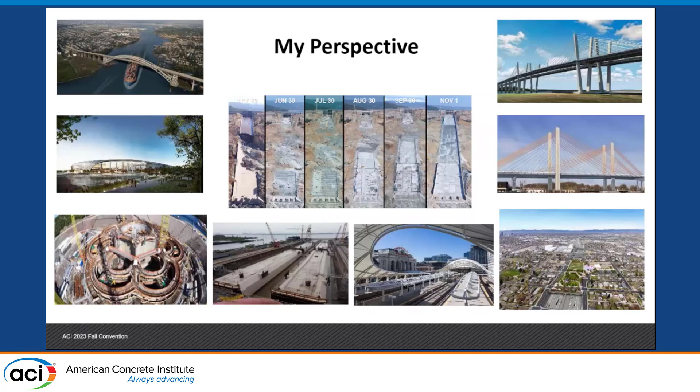The type of clients you're dealing with are very different too, because we typically have government clients, federal clients, highway authorities, bridge clients, marine clients, Navy clients. So the expectations are very different than a traditional private client where you can negotiate things.

Another challenge we have is that the work we do isn't just a high-rise building. We need to take the concrete from point A to point B, and typically the challenges are not the same. Although you can be in New York with very difficult challenges for placing concrete up, we sometimes have to barge concrete, pumping it in the river or in the ocean.

So you start making sense of and challenging the research we have to read sometimes in ACI, because it doesn't make any sense. And the other part is that we have different expectations of construction.

With segmental bridges, you need to deal not only with the precast work, quality, and the cantilever balance, but once you connect the bridge, you need a very high early strength concrete mix that's flowable, heavily reinforced, and then control the cracking that forms from shrinkage and restraint conditions, plus the thermal cycles before post-tensioning. Very difficult situations to control cracking, but it's part of what we do.

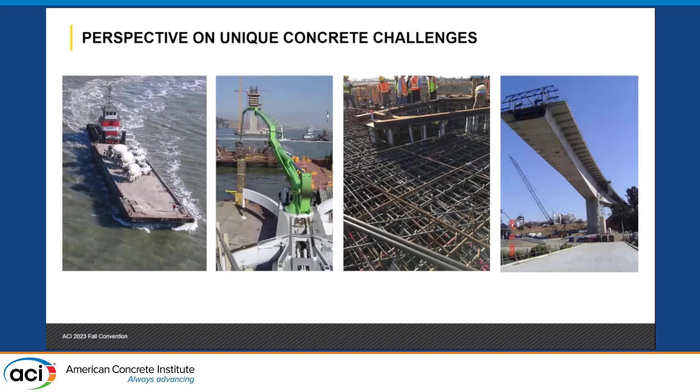This often happens with people who stay just in their own state, their own city, their own town, and never get out. If you get out of your town, you'll realize concrete is very different everywhere you go — actually, you were talking about shrinkage.

There's no good number because depending where you go, 0.05 shrinkage is great and 0.03 may be great in another part of the industry, and the aggregates you have locally cannot allow you to have very low shrinkage in some parts of the United States. So again, there's no magic number, but we get the false impression that concrete is just one size fits all and you can make it work.

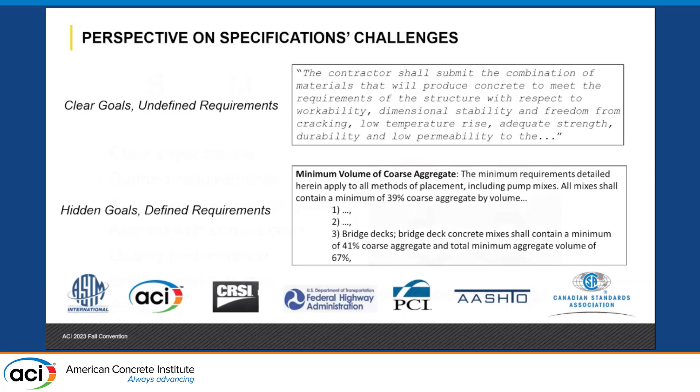And then as I'm looking at all that, I'm also part of a lot of initiatives for productivity and constructability of specifications for concrete. And I believe we sometimes try to engineer too much the approach to specifications. If you kind of step back and look at what we have learned to set goals, to truly set goals for us, right? Even in the management side, as a person, as a professional, a smart way of setting a spec is pretty easy.

Because when you think about it, you need to be very specific to what you're requiring, right? You need to make sure that you have a measurable way to assess that. You need to make sure it can be achieved to the point that we're talking here. Can it be achieved? Then it needs to be relevant to the work, to the point that the previous presenter spoke to. If the crack doesn't matter, what do you care, right? And then time bound, right? So there needs to be a time bound limitation too.

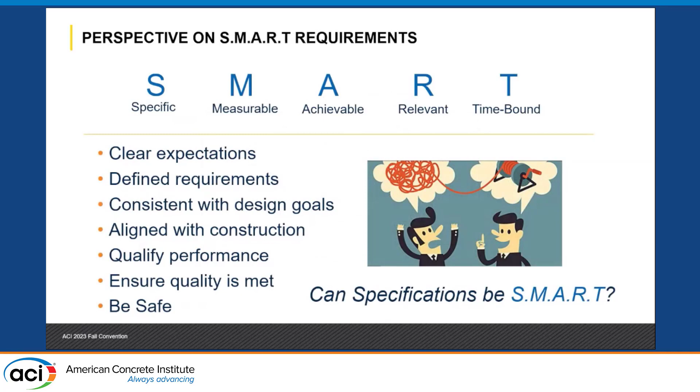Because if you get a crack after the structure is in service, that crack formed most likely well later than you build the work. So now why is the contractor responsible? A crack that happens that late is actually a design issue, not a contractor issue. You understand what I'm saying? So why would you all of a sudden have the contractor trying to fix a crack that happened 3 years later when the design should have actually been addressing the long-term cracking issues that could have occurred? So again, understanding how we develop specs is extremely important to make sure that we have the right solutions in front of us. Okay?

And this is actually, if you are not going to take anything from this presentation, pretty much this is your snapshot of the presentation. I always like to show a little bit on the front and make sure we close on the same topic. But pretty much what we're saying is this is not a one-person solution. Okay? This is not the designer coming with the best design. Because what happens if then you get the worst contractor and you have a bad mix, right? What happens if you have the best contractor, the best concrete supplier, the best designer, all of them put in their best effort, and the client doesn't want to spend the money?

Contractors, designers, producers do what we're paid to do. If you're not getting paid to do something, why would you do it? Why doesn't the owner want to spend more money? It's important to understand that we are dealing many times with cracking because that's what was bought. To the previous presenter's theme, they bought something, but nobody told them that actually what they bought is a different type of project.

It's extreme. I always say, I think I agree 100% with Calvin, I agree 100% with the design perspective, but what I believe is extremely important is that we realize there's nothing wrong with having a difficult conversation at the beginning. There's nothing wrong with going to that owner and saying, Mr. Owner, these are the alternatives we have in front of you. We have these alternatives that have some cracking issues, and we have an exposure condition that is a concern. I believe we need to address that.

Or no. Or just talk about, we have this cracking, we believe that cracking is within the standards, and actually if you see cracking as we start building the work, that's within the design expectations, right? And see what happens at that early stage. Again, to Calvin's point, most likely the owner is going to be stubborn, it's not going to make the decision.

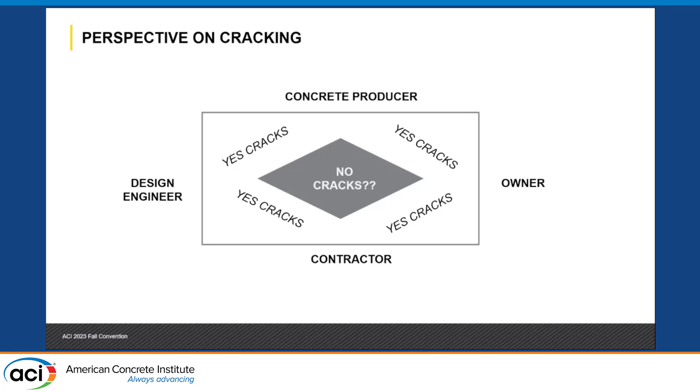So again, it's a factor of group involvement, and make sure that you get to that middle. Once you get there, there's no guarantees on no cracks, but certainly you can maybe reduce the cracking once you agree on the approach to actually get the solution.

So we'll go step by step because it's important to understand construction, and what I'm going to be showing will have less text as you start seeing my presentation get more figures and photos. But certainly there's an aspect of strength, durability, workability, and economics.

Once you approach any concrete project, you need to understand there's a balancing act. It's not all about, we got a crack, and then what? If you get a concrete mix that's very low shrinkage with good aggregates and all that, but you cannot place it, well, that's worse, because now you're going to create voids, consolidation issues, and there's going to be no ability to develop that strength. So you need to make sure you balance the approach to concrete.

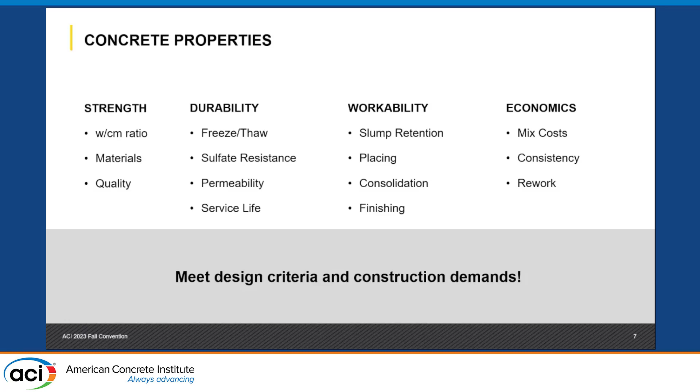The other thing is, what is the schedule in front of us to develop that solution? If you go to a commercial concrete producer and he doesn't have the solution for you to get low shrinkage or a low risk of cracking in the mix, that's going to take time. Depending on the type of work you have, that's likely going to be another issue as you start building the work. So make sure that you understand what is in front of you.

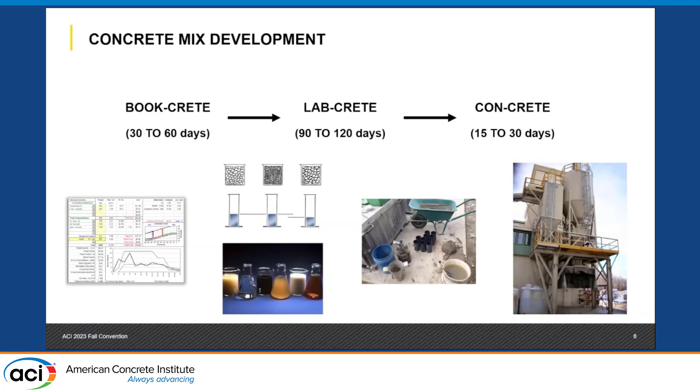For the concrete producers, putting an admixture is not going to solve your problem. We continue to see, well, let's put an admixture and that's going to make it work. You need to develop the good mix first.

Make sure that you have a mix with good quality materials, you optimize the water demand, reduce paste content, reduce mortar content, optimize it for the purpose of the work. Then the admixtures help you enhance that performance for whatever application you're going to have. If you have a bad mix and you try to put admixtures, it's still going to be a bad mix, just with a lot of different admixtures.

Then the economics. Many people misunderstand economics of concrete, and many believe that contractors think, give me the cheapest mix. The cheapest mix is not the best solution, I'll tell you that, and you can say a contractor said it. It needs to be a mix that is optimized to do the work that you need to do.

Talking back about architectural concrete, let's assume you have an architectural concrete mix that gives you a beautiful finish, but it cracks. How good is that? You still have a bunch of cracks in the architectural face, and now you have to deal with that.

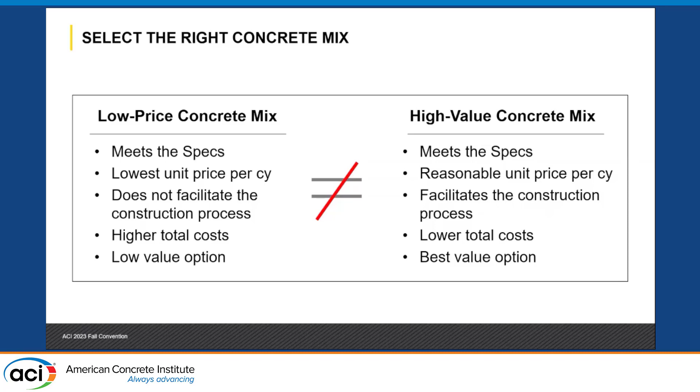So make sure that you understand, as a concrete producer, to ask the right questions. Don't try to get into the cheapest solution. I know we have a competitive market, we get it, but it's not necessarily about being cheapest. Maybe you need to go a little bit higher, sell the value of the mix, and educate the concrete contractor and the owner to make sure you get the right solution.

And the other part that I want to talk about is lubrication. Lubrication is extremely important for construction. As you saw in the type of work we do, sometimes you have to pump concrete long distances, and take it through different ways of transportation. You need that concrete to be workable.

So I always make sure people understand concrete from this perspective: there are 3 levels of lubrication. The first level of lubrication, what is it? The water, right? What happens next? You get the paste, and then you get the mortar. The three of them need to be balanced.

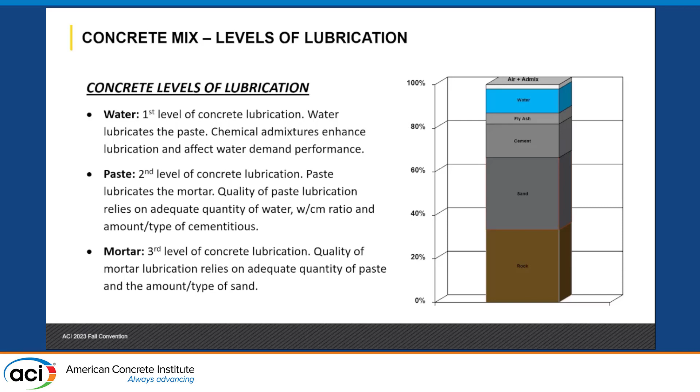If you have a mix with low water, you're going to have a poor quality paste. If you have a mix with low paste, you're going to have a bad quality mortar. And if you have low mortar, you're going to have bad quality concrete. So it's a balancing act of how you approach concrete mixes, and all that is here because to build work, you need to have different levels of lubrication. I didn't come up with this.

If you go through these references, CA and ACI, you're going to see that different types of applications require different levels of lubrication. Okay, so let's talk about cracking.

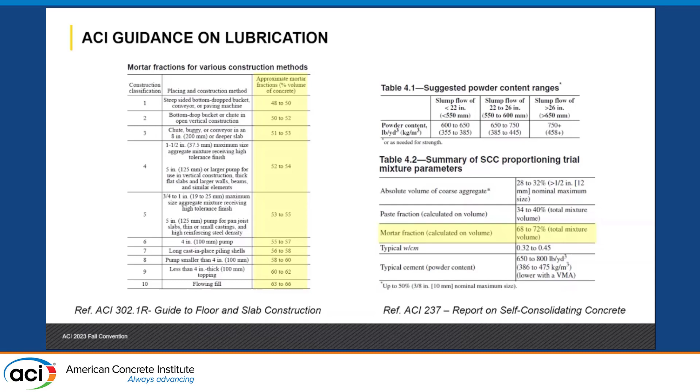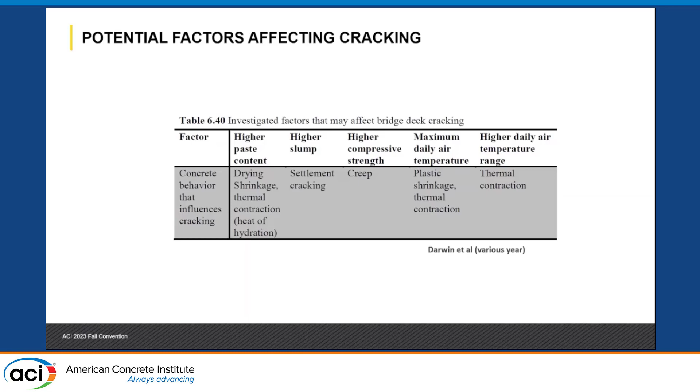I'm using this for reference in respect to Dr. Darwin. I believe he has done a lot of good work on bridge decks and all that, but I think he makes a point here. There's a lot of different aspects of concrete work that actually impact bridge deck construction that can result in cracking. So let's talk about one aspect we deal with a lot, and then I'll talk about construction efforts and means and methods.

And then what is the other issue that could happen in the plastic state? You're going to end up with plastic shrinkage cracks. That plastic shrinkage cracks typically tend to be limited to the top. However, with time, drying shrinkage comes and compounds to those cracks and they get a little bit deeper. But that's a responsibility of the contractor to protect and cure the concrete in a timely fashion.

Sometimes, and I'm not going to blame the contractor 100% on this, you get mixes that have low bleeding. But that's why concrete contractors need to start understanding concrete materials. I believe what's happening right now in the industry, with a lot of discussion around the change to 1L cements and contractors and concrete producers and all that, is that we've been used to having a certain type of material for a long time, and now with the change we realize we need to get more involved.

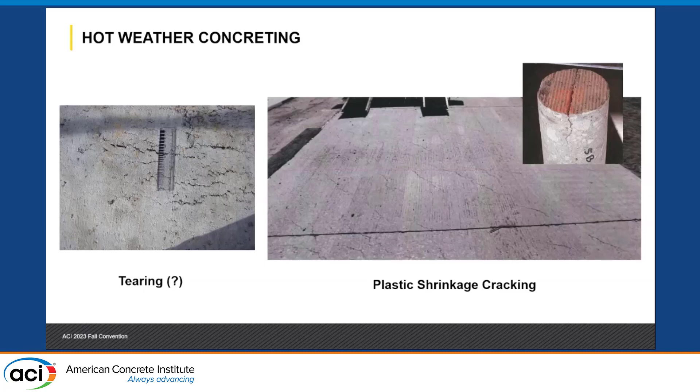And that's how it looks. I actually have it embedded there. That's how plastic shrinkage cracks look. So many people have never seen it. They believe it goes deep. In this case, it's pretty shallow.

What about this crack? I'm going to show it here and let you figure out what happened, because it's pretty easy, right? What do you think happened? You see the crack here? You see there's another crack here? Do you think that crack was caused by an issue during construction, or do you think there's already an existing crack or disruption in the surface below that is actually reflecting the crack on the top?

How can you control that? Because you did not design it, you're just building the work, and you have that interruption of continuity on the bottom of the substrate surface. All of a sudden you build it exactly to the drawings, exactly to the specs, and you get a crack there. Who's responsible for that? Well, eventually it doesn't matter. You're the contractor, you're going to have to eventually fix a lot of things to make the client happy, and eventually that becomes a negotiable point.

But as designers, you need to have a better understanding of the site. If you have conditions on the site that are going to create that condition, and they fall even in a bearing surface, what do you need to do? Is there a detail in your design drawings to actually modify that location, to disrupt the concrete element, to make sure you don't get those reflective cracks?

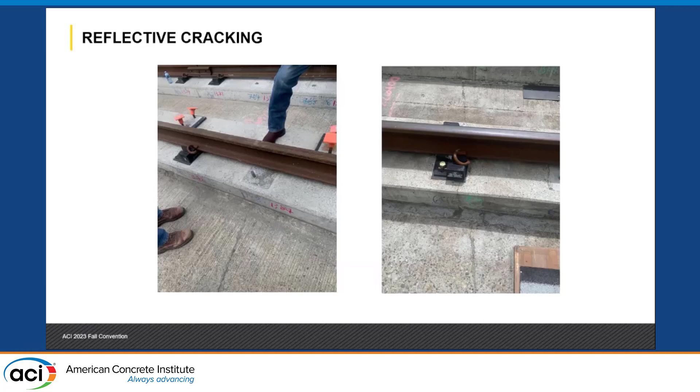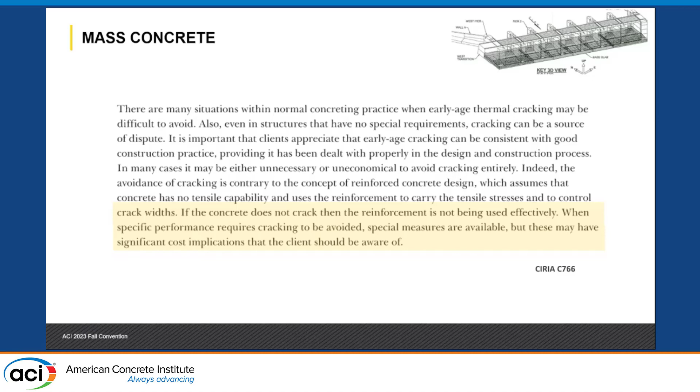You create a thermal shock, you crack like a glass, think about it that way. But these are mass gradient cracks. Mass gradient cracks are associated with the thermal contraction of an element. Thermal contraction of an element is not about the temperature difference, it's actually from the temperature drop from the maximum to the equilibrium temperature. And that's what you see here.

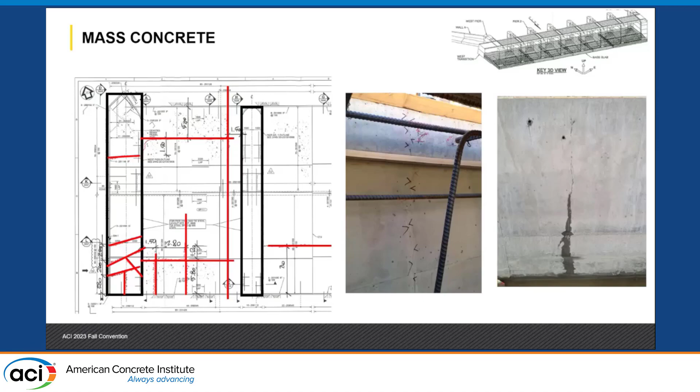Too much water. Why too much water? I'm going to pick on you, whoever said that. Bad mix design. What happens if you have too much water? That's one cause, but tell me, what is it? Why do you say that? Why do you say too much water is a problem?

Okay, so you may have a lot of bleeding and you may lose the viscosity of the paste and therefore you settle. Okay, that can be a cause. Great. What about on the right side? What else could be a problem? Plastic settlement cracks, on the right side. High cementitious. Okay, how would you cause that with high cementitious?

Okay, got you. So you're saying a high amount of pozzolanic material can delay the setting? Okay, got you. Those are potential causes, right?

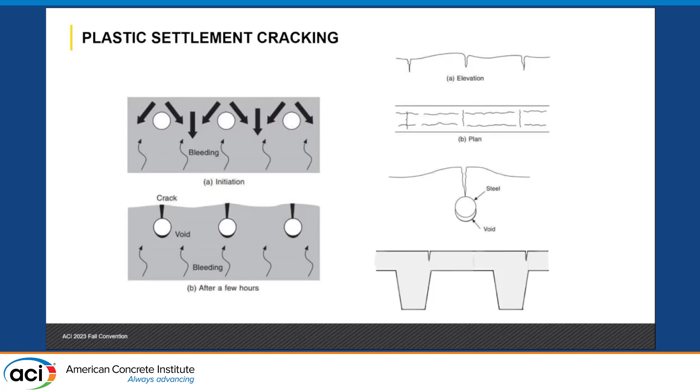The intent is that in the past, slump was managed with water, so the higher the slump, the more water, and then the more water dilutes the paste, creating lower viscosity. To improve resistance to plastic settlement cracks, you need higher viscosity, so you don't get settlement of the mix and everybody stays happy together in the same place.

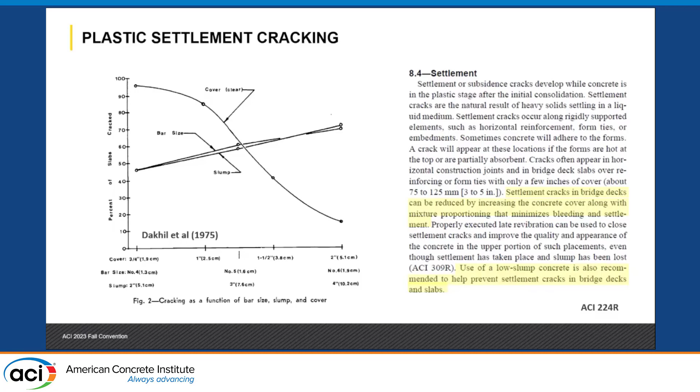And the clients, the people who aren't here sometimes, get misled and misunderstand the concepts. All they say is, yeah, we need a low slump concrete for your bridge deck to be free of cracks. Well, good luck, because then how are you going to build it?

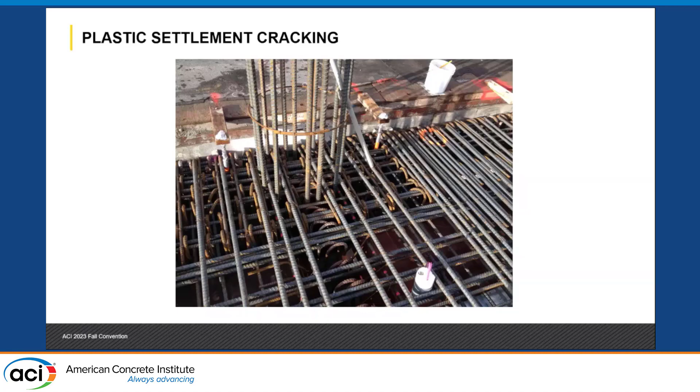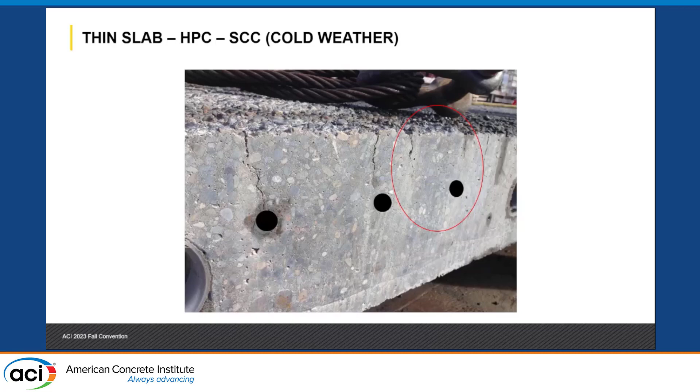This is a project that got into a cold weather situation from a cold front, so the top surface got frozen. That's why the quality of the surface is damaged. When we did the cuts, we saw a lot of cracks typical of plastic settlement. In this case, the mix was not setting for a long time. The cold weather came, it wasn't protected, it stayed without setting for a long time, so you had a plastic condition and it ended up settling on top of the rebar.

Now this one, what is it? All of a sudden you have a low slump condition, but you have mass concrete, so it relates to the point you brought up earlier about high SCM replacements. When you have high pozzolanic material and low temperature, it takes longer for the material to set, and by not setting, the same effects happen.

In this case it's magnified because you have a thicker section, a mass concrete section, so imagine the mass settling on top of that rigid rebar, and you get those types of cracks. So both can happen - in low slump concrete and in self-consolidating concrete. So it's not necessarily the slump that matters, but the material you use, the temperature conditions, and the level of stiffness in the rebar system.

Even when you have a lot of rebar connected together, you don't get that effect, because you're bridging across the rebar. But if you have just one rebar, and 12 inches away another rebar, you create a sack, like a hammock condition, and you see a bigger effect of that.

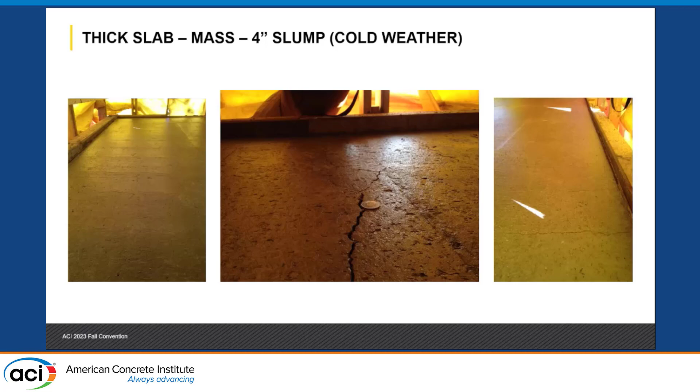Somebody's shaking their head there. What does that mean when you're shaking your head?

It's an architectural detail. It doesn't do anything. You're just scratching the surface of a system that has reinforcement crossing through, and the sawcut is only like this, it doesn't get deep enough to create a cut. So you're just making a nice reveal on the surface that makes it look nice, but once it starts cracking, it's going to crack all over the place.

So in this case, to make it work, what you needed to do is make sure the design provided a nice sawcut, deep enough, to make sure that system is going to get dislodged there, and discontinue the welded wire mesh at that location. So you don't have continuity of the rebar, of the mesh in this case. You allow the system to pretty much break there.

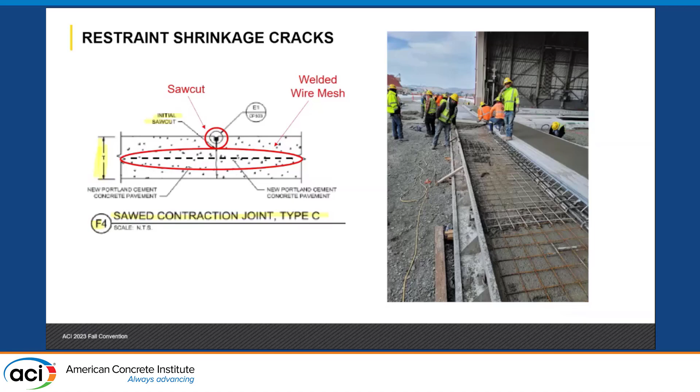So we got a case like that, and we presented all this to the client. It's a federal client, so we explained that the design in front of us didn't make sense, that all the remove and replace they were asking for was not necessarily in alignment with the specifications and the design.

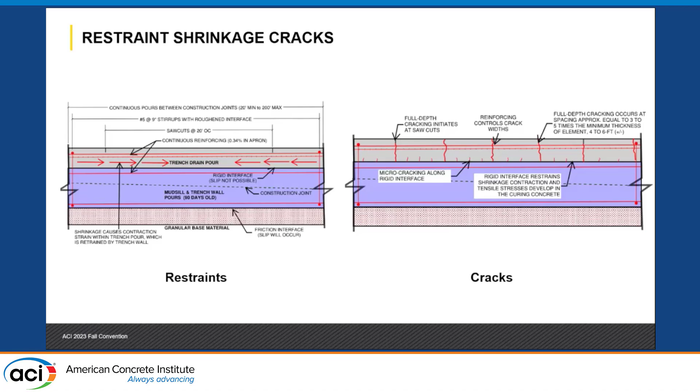And to Calvin's point, he mentioned he's never seen anybody doing this cracking analysis, by any designer, which is true. People don't do this when they're actually designing. You start using this when you have a problem and a design team that has the capabilities. So this is what we ended up showing. We did the cracking analysis of the whole system, showing that what they designed and provided us was going to crack exactly the way it cracked. It cracked every certain amount of feet, exactly the way the book will read and the way ACI will show you. We just showed with analysis that that's what they were going to get.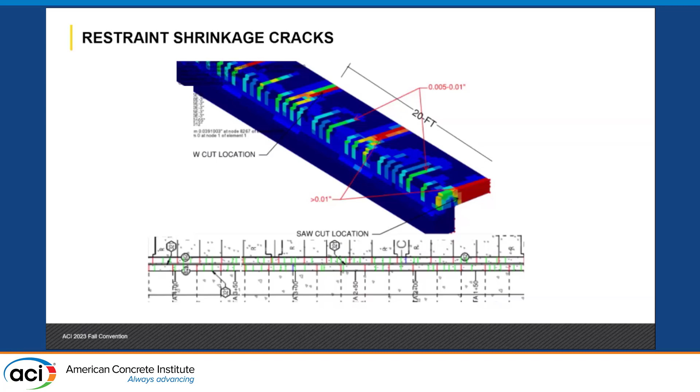Okay, then the next one, the last one I'm going to talk about, is also another very interesting restraint shrinkage cracking. Well, it was all sorts of things, but restraint cracking during construction. This one, as you can see, is a water filtration, water treatment system. One of the failures in this design is they didn't have any disruption of continuity of rebar, either by joints or by appropriate detailing.

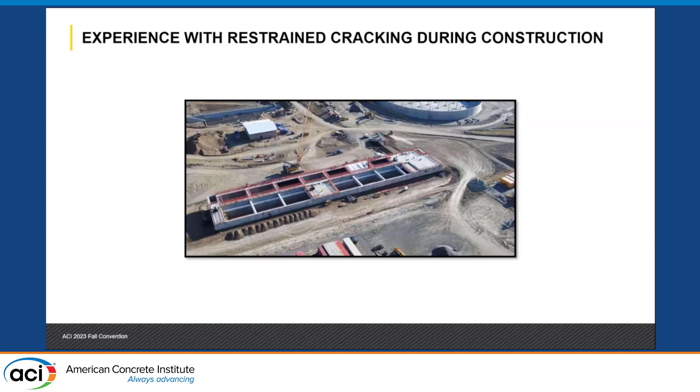Let's put it that way to avoid confusion. But in this case, something they did that created a lot of cracking, as many people do, is in the lower part of the walls you have a lot of rebar. But then at some point they say, well, we are far from the restraint at the bottom, so I'm going to start releasing a lot of that rebar. So what ended up happening is we were very compliant on the part under about 4 feet there, and then after that we started seeing wider cracks.

Why is that a contractor problem? The design is telling them that what they got is working the way it was designed to work. They put more rebar at the bottom, you close the cracks. They space out the rebar at the top, then you get bigger cracks. Why is that a contractor issue? Is there anybody who can tell me that's a contractor issue, getting cracked? The contractor is not an expert on design, and the contractor doesn't inspect the design, but that's not a contractor issue. The contractor followed the specs, used the materials specified, used everything approved for construction, built the work. There was no non-compliance. We let the concrete get built, and as the concrete started getting more restraint, the cracks started to happen.

We got to see crack widths of 0.012, 0.014 in some cases. It all varies by the detail I'm going to show you now.

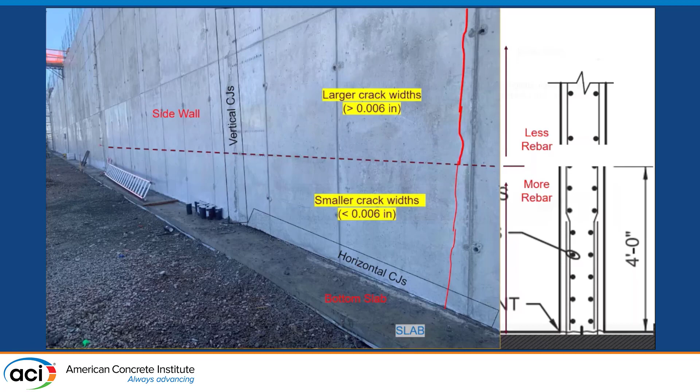So then the other part we started seeing was a lot of cracks at this transition zone. That's another detail I always say is a bad detail. You don't want to have something extremely stiff, then disconnected by something really loose, because what's going to happen? The more flexible part versus the rigid part, and then the transition is going to have an immediate crack at that location. So what you can see here, I tried my best to portray this, but you have a very rigid system, this is a top view. You have a big wall, heavily reinforced. This is a beam, so now you have all the connection there and all the restraints. And all of a sudden, the transition here, look at how it is.

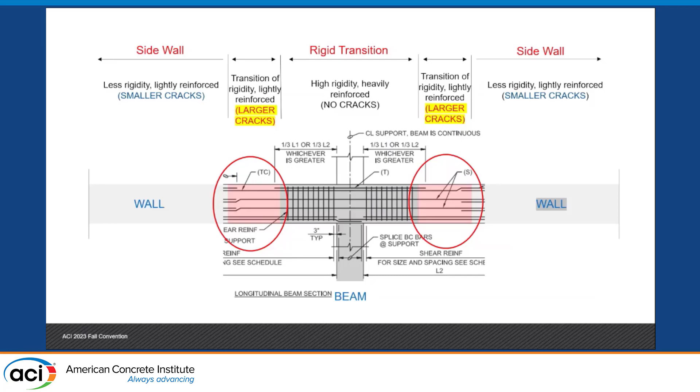You go from being stiff and very heavily reinforced to a zone of very lightly reinforced section. What's going to happen when something wants to crack and have some movement? It's going to crack there. This is expected by design.

This is another analysis, actually. Look at how cool this one is. We went to look at the walls that were showing some moisture penetration from one side to the other, so they were not leak free, and we had to do a lot of fixes there.

What you see there is actually, we went and analyzed exactly the design as provided. And we ended up showing that the design as provided was going to show the crack exactly as provided. So the contractor provided the cracks that they designed for.

Now the issue is that the designers don't do that type of analysis before, and they don't specify conditions that get into the behavior of the material and the restraining conditions during construction. Once the building is completed with all the sequence of work, all of a sudden you create cracking conditions that most likely nobody thought would be checked and verified the way we did.

There was a point we had to get into this cracking analysis to show them we're doing everything you designed. We needed to check if we were doing something wrong, and when we did, we showed it. You can see here the red points are showing where you have more rebar. So we did a sensitivity analysis.

We show with the sensitivity analysis that if you reduce shrinkage - because there was no shrinkage requirement, by the way, for all the people in the internal cure concrete - we made an assumption this concrete has a certain amount of shrinkage, then checked it. Now we make a reduction and see what happens.

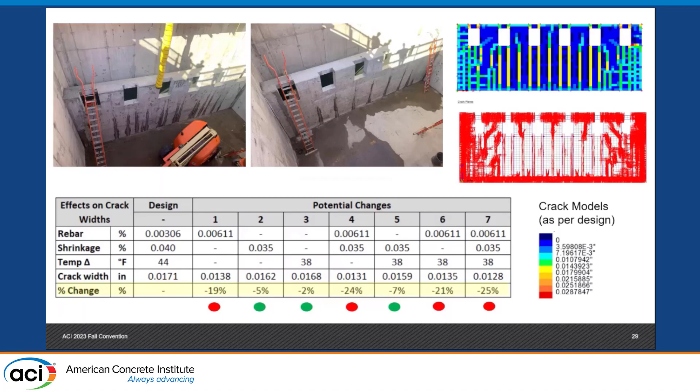What comes back is that the design team needs to understand there's a responsibility to understand the service conditions and construction operations to build the work, so they can provide adequate detailing of those designs to make concrete structures that reduce cracking risk or mitigate cracking better, because the contractor is not going to be the only solution.

So this is what you guys should take from here. You can do your best effort, the designer can do their best, you can have the best mix, and the client can have the best amount of money to build the work. But you have to come to a happy medium. If you want to be only on one side of the equation, you're not going to be successful. You can control, mitigate, and reduce cracking.

But if you want to get crack-free structures, you need to make sure you have the right specifications, design, cost, schedule, materials, and construction methods to significantly reduce cracking, maybe to get crack-free. But again, even post-tension structures are going to get cracks.